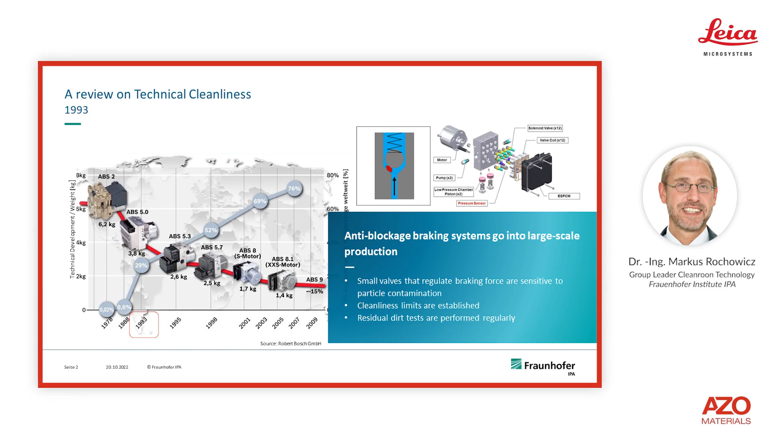In 1998, we have another big step regarding technical cleanliness, because at that time you can see the number of cars with diesel engines increasing dramatically, let me say from 12 to 15% up to nearly 50% of all cars. And the reason for that was a big step in performance of the diesel engines due to a new generation of diesel direct injection systems that we have.

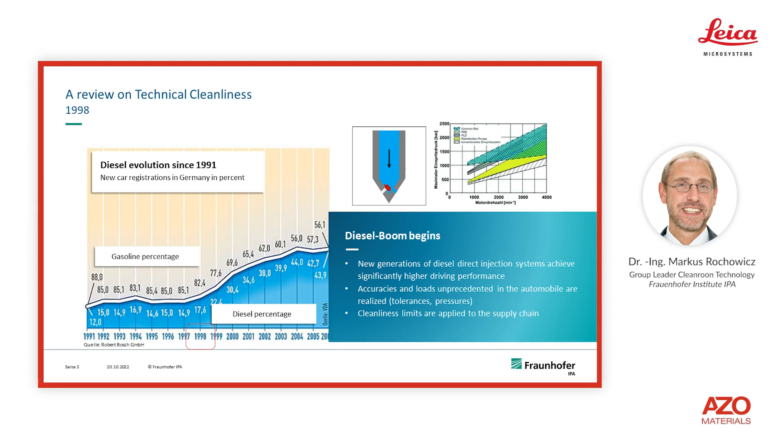And connected with that, we have a dramatic increase of power densities, very small tolerances, very high pressures, up to 2,000, 3,000 bar, that you can see in the graph here at the top right. Due to these very, very precise systems and the high injection pressures, the injection nozzles became very sensitive regarding particles that can block these nozzles.

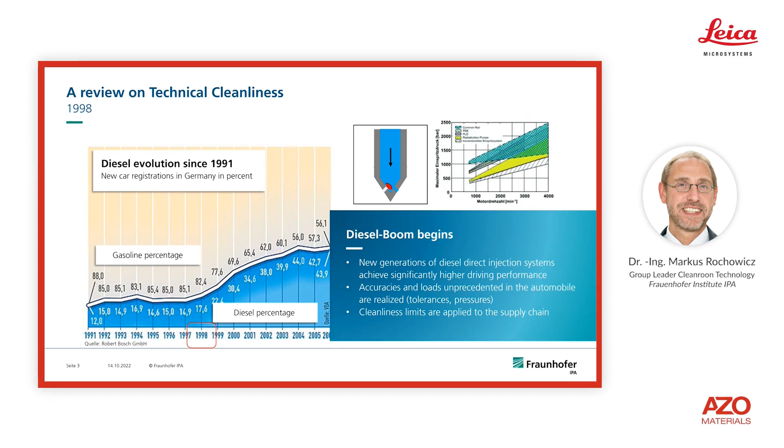And in that time, the producers of these systems decided not just to solve these problems inside their companies; they wanted to buy clean parts from their suppliers. That means the cleanliness limits are given to the entire supply chains. So a lot of companies, tens of companies, hundreds of companies have to deal with this aspect of technical cleanliness, cleaning their parts and checking cleanliness.

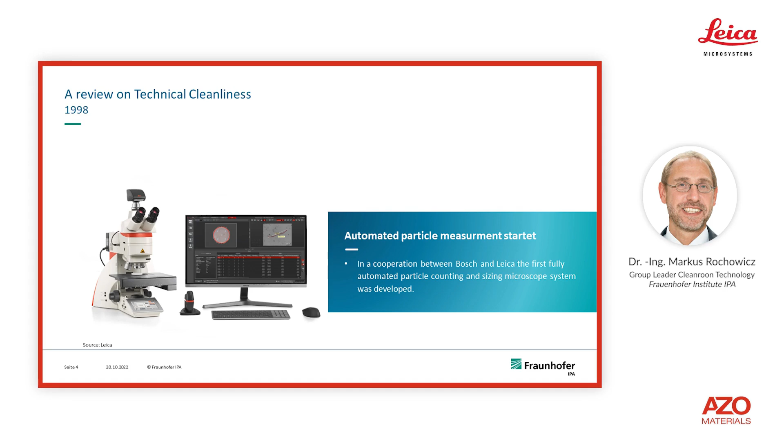And also in this time, around 1998, the first fully automated particle counting microscopic systems were developed in a cooperation between Bosch and Leica, and that was a very big step for laboratory people to make a precise and trustworthy measurement of particles. And with this progress, around 2001, the first working group was established talking about a standardized procedure to check technical cleanliness on laboratory level in, let me say, the customer-supplier relationship.

And before they started their discussions, because they wanted to talk about residual dirt, somebody raised his hand and said, okay, it's not possible to talk about residual dirt because that sounds negative. That sounds like we have problems with quality. Nobody wants to talk about quality problems. So the task was to think about a new terminology for residual dirt. And then somebody came up with technical cleanliness. And everybody was happy with that because technical sounds good, cleanliness sounds good. So with this topic, the working group could be funded and the work could be started.

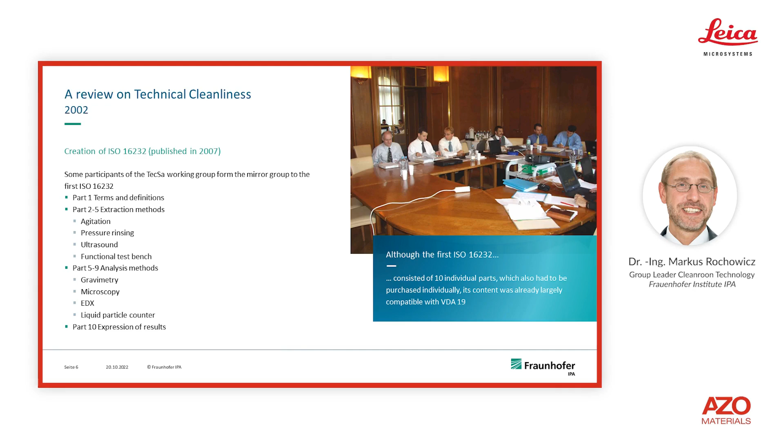In 2006, battery cells were not yet a major issue in the automotive industry, but there were already indications of sensitivities with regard to particles, because in 2006, laptop batteries from Sony self-ignited in at least 40 cases, so a lot of laptops burned down, and more than 100,000 laptops had to be recalled. And the cause of that were small metallic particles inside the battery, perforating some insulation layers, leading to internal short circuits. And as a result of that, those batteries started to burn.

Also in 2006, a lot of experience came up because many companies produced components with cleanliness specifications, had invested a lot of money in washing technology and industrial cleaning processes, had their own cleanliness laboratory, and regularly checked the cleanliness of their components. But on the other hand, they often could not comply with the required cleanliness, that means fulfill the cleanliness specifications. And therefore, they were looking for further levers to improve the cleanliness of their products.

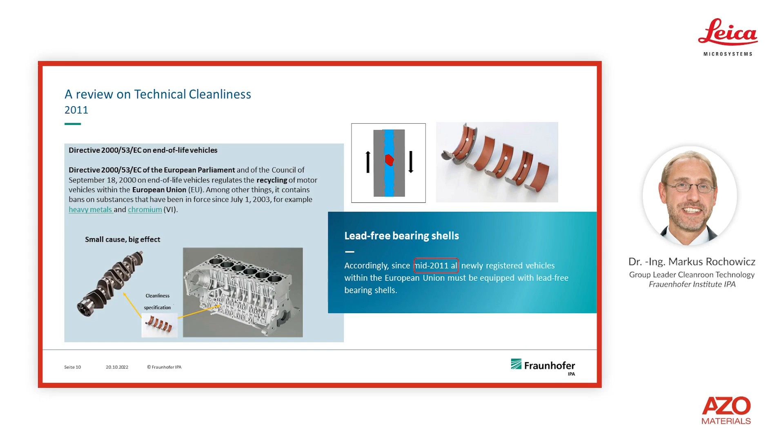Roundabout after 10 years of technical cleanliness in 2011, if you have a look at the laboratories that are established, you can say roundabout 25 supplying laboratories were found all over Germany, and roundabout 1,000 automated light microscopes were sold until that time. That means also around 1,000 labs are established in the automotive industry or supplier industry, and also 50 automated scanning electron systems were sold at that time. So a wealth of experience with the VDA 19 has been gained.

And with this experience of lots of laboratories and hundreds of people, revision of the VDA 19 was started between 2012 and 2014 in an industrial network called TecSa 2.0, Technical Cleanliness 2.0. And the aim of this revision, or the necessity to revise it, was people want to have a better comparability of their test results. There was a lack of comparability in the past. But on the other hand, they have the wish of more freedom regarding further tests.

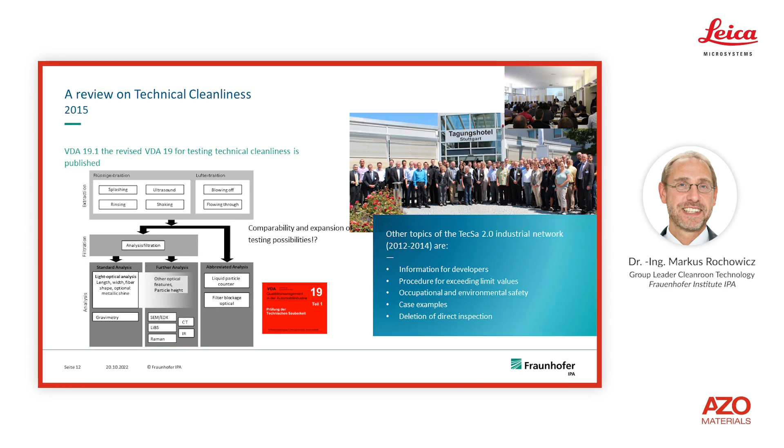This was a problem, and this problem was solved by establishing different pillars for these analyses that you can see here. The left pillar here is the so-called standard analysis. Here we find technologies like gravimetry or light optical analysis. And these were regulated very strictly. The parameters like illumination, or parameters of the image analysis, were very strictly recommended. So here it's possible to have a very good comparability regarding the results.

And if you want to know more about your particles, if you want to do root cause analysis and so on, you can use methods of the further analysis that you can see here, or also if you want to do monitoring with very fast technologies. But in these two topics, the further analysis and the abbreviated analysis, you're completely free in what you're doing, because these values are not discussed in the customer-supplier relationship. If you want to talk about cleanliness specification, then please use the standard analysis.

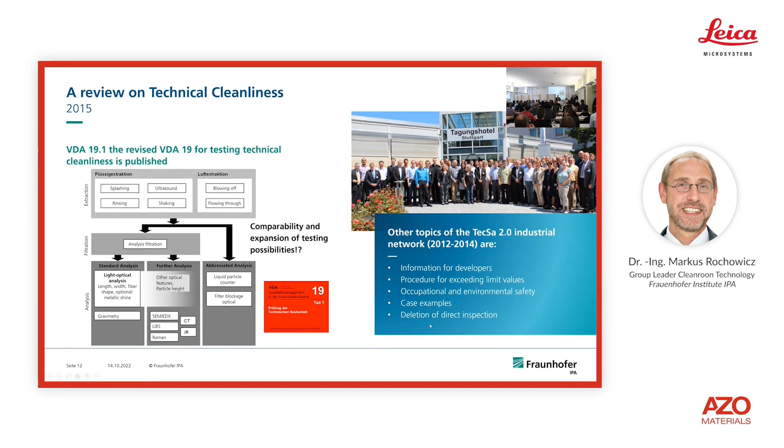Also, in the new VDA 19 Part 1, you find information for developers on how to develop a cleanliness specification, or a procedure for exceeding limiting values. You find information about health and safety requirements and a lot of case examples to support newbies in that field to become familiar with these technologies. And also the direct inspection that was included in the original VDA 19 was deleted, because there was no technology available for a direct inspection that worked at that time.

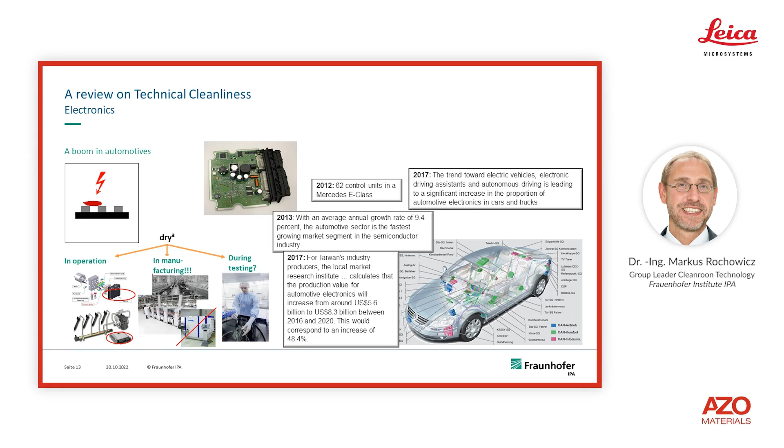In the meantime, not just liquid-based systems are placed in cars, like engines or fuel engines, or gearboxes with oil, or cooling systems with liquid. We also have a big boom in electronics. Just have a look at this part here, from 2012: at that time you had in a Mercedes E-Class 62 different control units. That means 62 PCBs all over these cars. So this was a real boom.

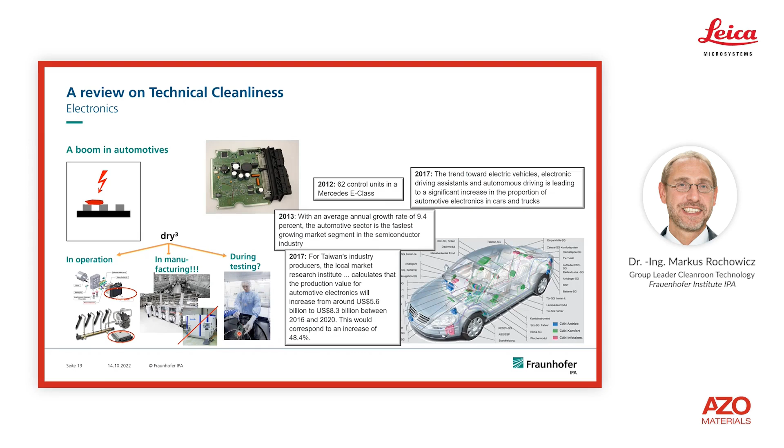And as you can imagine, electronics are very sensitive to particles, especially to conductive particles. As you can see here on the left side, this leads to short circuits and malfunctions of these electronics. But if you look at the operation of electronics, this is in dry conditions, so they are not wet in the automotive. And also during the manufacturing processes, this is an absolutely dry environment. No liquids are used, and electronics PCBs are not cleaned with liquid-based processes at the end of the process chain. But when checking them in the laboratory, at that time liquid or solvent was used to clean them off. But the question is, are there other possibilities to extract particles from electronics, from PCBs?

At that time, a new working group was also established at the ZVEI, the Society for Electronic Producing Companies in Germany. They established a working group regarding technical cleanliness and a guideline, which is now available in the second edition. They took parts from VDA 19 Part 1 and Part 2 and took a more precise look at typical aspects of electronic production and electronic parts, to help people control their cleanliness but also to show the limitations of cleanliness. And as you can see here, they also developed a risk assessment tool where people can assume or calculate the risk of short circuits if they find residual dirt particles, for example, on a PCB or inside a control unit.

And from my point of view, this was a very targeted approach, because they have a lot of discussion with specialists. They are doing their own research, their own developments. They have congresses to spread their knowledge, and they are also in dialogue with the OEMs to share their knowledge.

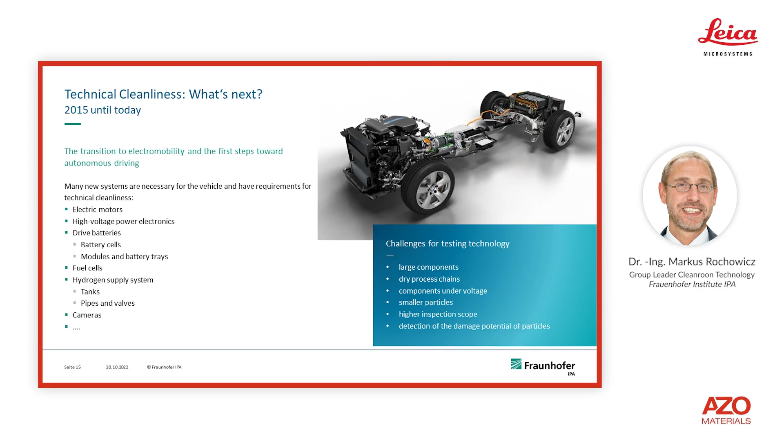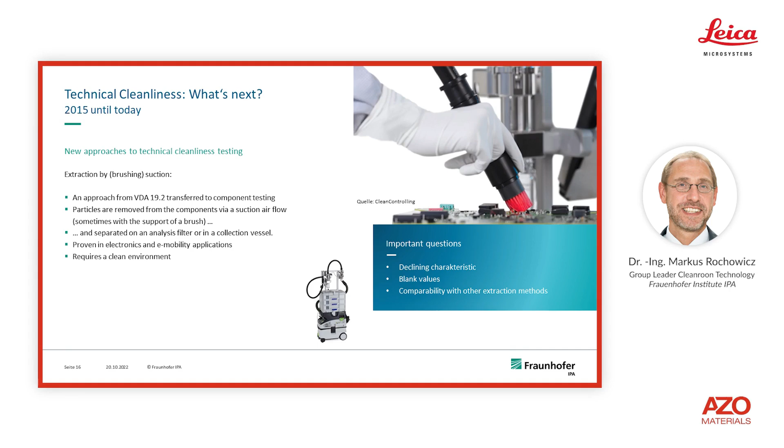And also the questions on the right side, declining characteristics, the blank value, which are very important parameters from the VDA 19 point of view, and the comparability with other extraction methods are well known. And also there was a very good work of this ZVEI working group to get more information about the capability of these new extraction equipment.

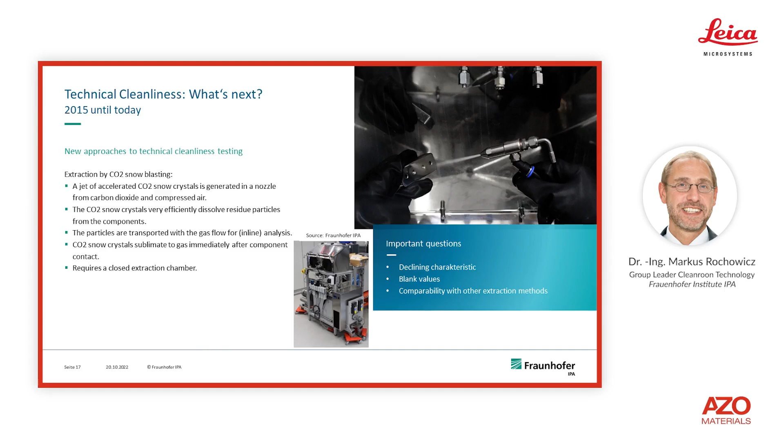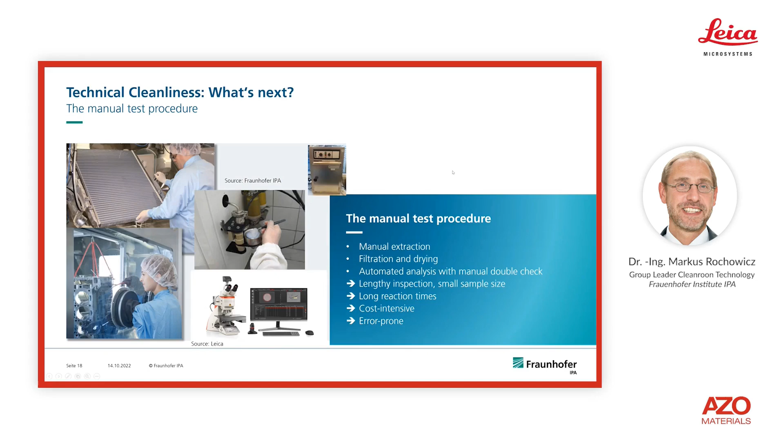And in some, you have a lengthy inspection, you have small sample sizes, long reaction times, it's cost intensive and error prone. And people are asking for fully automated systems for checking cleanliness. And also in this field, we have new approaches.

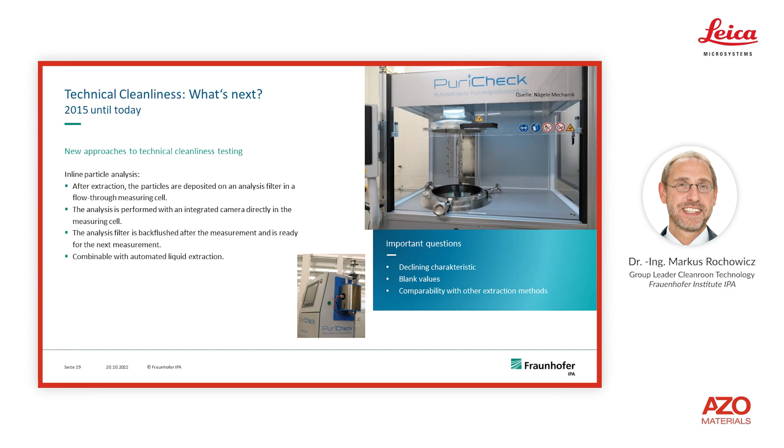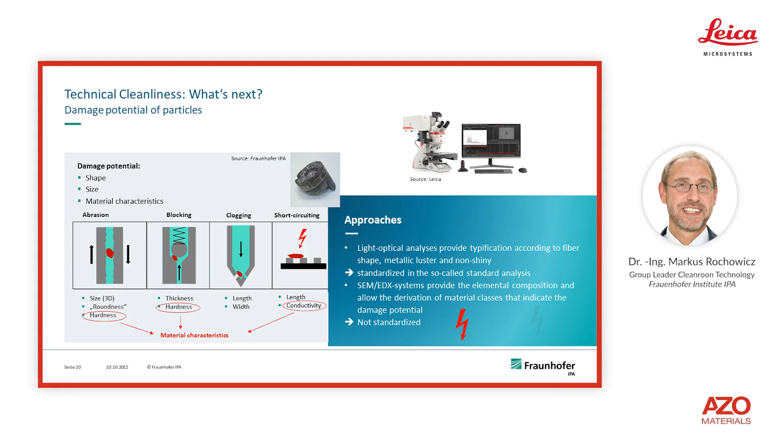And other systems like a LIBS system that you can see here at the top, or especially scanning electron microscopes with EDX systems that provide an elemental composition that allows a derivation of material classes that indicate the damage potential of particles. These are not standardized.

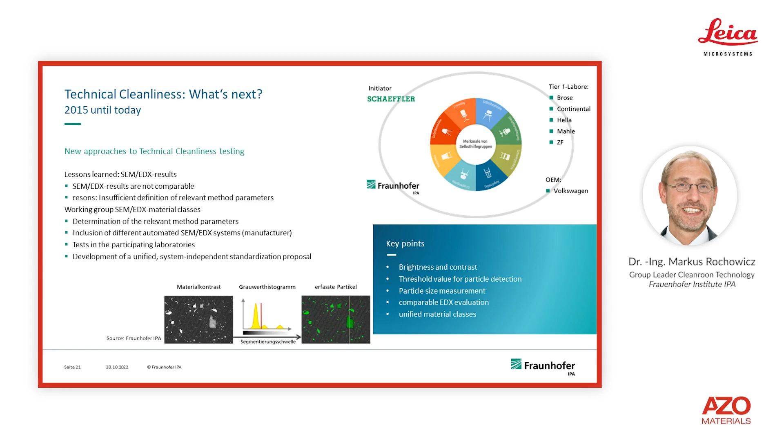And therefore, a working group was founded, I think, 1.5 years ago, to discuss these problems, because there are a lot of problems at the moment in customer-supplier relationships, because these results are not comparable. And the reason is insufficient definition of relevant method parameters. And this working group is working on a solution for that, to find parameters to make these analyses more comparable, but independent from the system. So for different types of scanning electron microscopes, find a parameter setup to make them comparable.

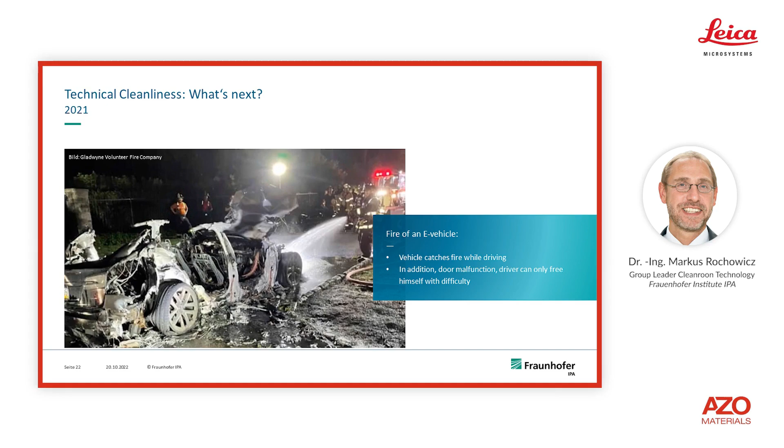And now it's time to think about a revision of VDA 19 Part 1 also. And this revision was requested by the VDA QMC itself in 2021. And here you can see the topics of a revision, for example, inclusion of the new extraction methods like vacuuming or CO2 snow, or to make the SEM systems with EDX analysis more comparable to use also for standard analysis, and also to improve the fast systems like these optical filter blockage systems that I showed you for automated analysis, to make them comparable with the light optical microscopic analysis, to use them also for standard analysis.

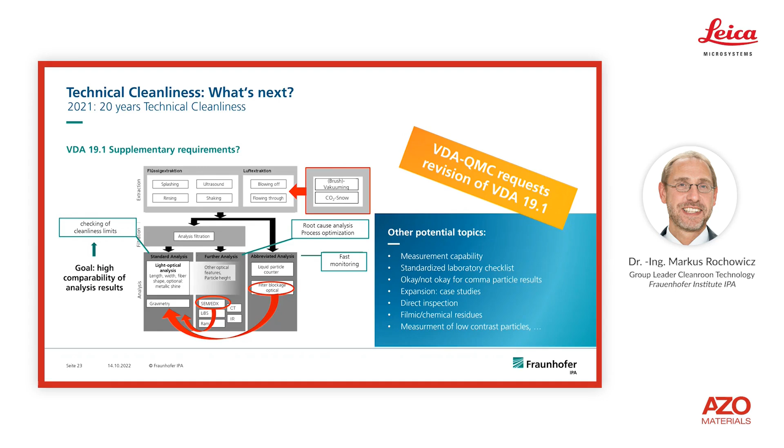And some other topics like measurement capability or standardized laboratory checklists, to expand the case studies to include some examples from electromobility, to re-include the direct inspection, because now we have some good solutions for different tasks or different questions in technical cleanliness. And last but not least, the measurement of low contrast particles. These all will be topics for the starting revision, and this is planned for the beginning of next year, maybe in January or February 2023, we will start this revision.